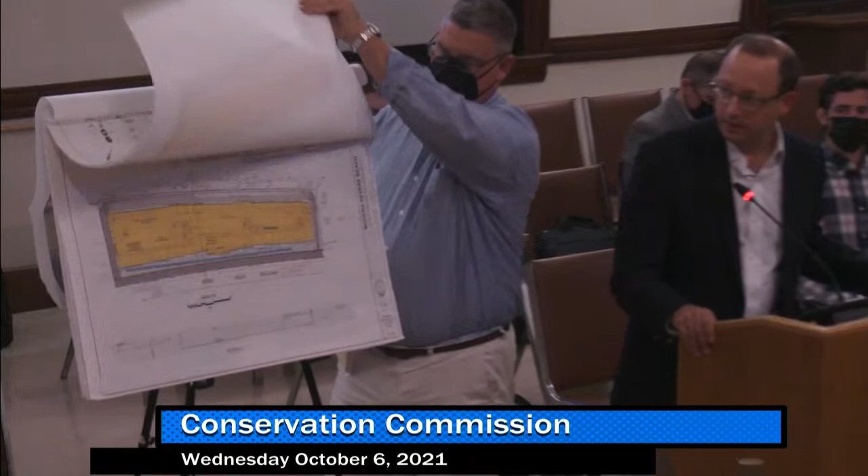It would be parking within a podium, starting on the lowest level, with 2 levels above of parking, all within the podium, and then 5 levels of residential wood frame construction above. The project is being designed and permitted within all the guidelines of the city zoning ordinance, so a by-right application, if you will, to follow all the local regulations.

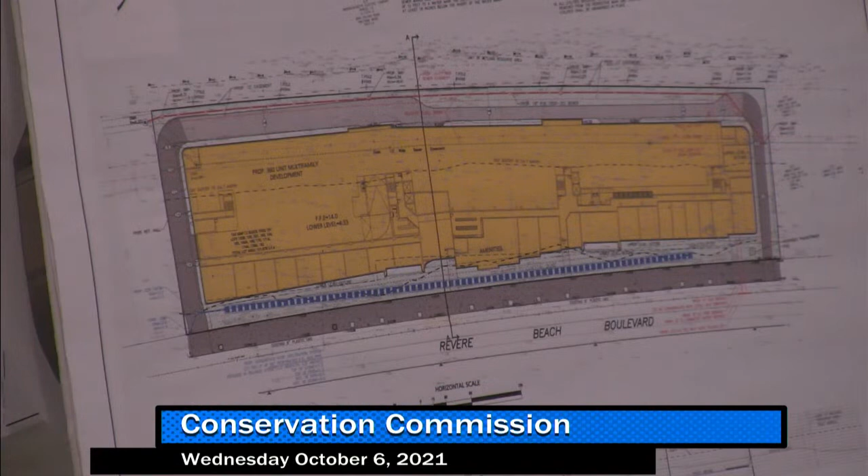What am I missing, Rick? I think that covers the basics. Talk a little bit about how you've mitigated any stormwater on site. Sure, yeah, Rick's probably best to go through that.

Thank you, Mr. Chairman, members of the commission. For the record, Rick Salvo with Engineering Alliance.

So the resource areas present on site: there's a salt marsh located to the rear of the property, off-site, on the other side of the narrow gauge railroad, which causes a 100-foot buffer zone to extend into the property. About half of the property is located within the 100-year floodplain, which is elevation 11. Obviously this is a coastal floodplain in this area, so it's the resource area known as land subject to coastal storm flowage. In the existing condition, there's an existing developed dwelling, very large, with a maintained and mowed yard area.

As most of you know, like all the other properties on the boulevard, these are pretty parallel. The grades range anywhere from elevation 12 to 15 at the boulevard, and then grade down to about elevation 5 or 6 in the rear. That enables us to set up a scenario where we can fit the building right into the topography, with access to the underground parking around the back at grade, and access to the street level parking, entering and exiting on the sides, also at grade. So stormwater runoff generally flows in a westerly direction from the boulevard towards the rear of the property.

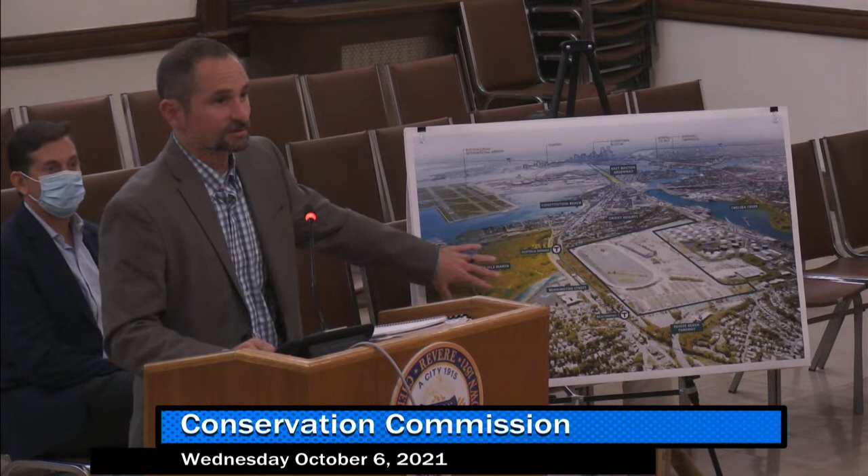In addition, we also had a notice of intent filed for a portion of the first phase of work being undertaken for the project. So initially we had this condition, and we've filed several notices of intent since. The goal is to maintain the project as we move forward by filing new notices of intent. This is a four-phase project. We're here showing you the first phase, and it will take many years to complete. We always refer back to this existing condition whenever we discuss it.

So with that, I'll step into the actual Phase 1R plans. The approach we're taking has two different components of the project: the infrastructure and roadway that supports all the buildings and parcels, and the buildings and parcels themselves. The roadway and infrastructure presented here is the initial phase of the roadway.

This northeastern portion, shown in thinner lines, had been previously approved under an earlier notice of intent. We're looking to supersede that order of conditions due to some changes requested and worked through with the city. There have been minor changes since that time, where we've removed a pull-off area along Winthrop Avenue, worked on utilities within the previously presented roadways, and adjusted some intersection alignments with the city. That's the reason for including that earlier Phase 1 portion in this project, and we're also extending the area where that Phase 1 portion used to reside.

So the thinner lines in this northeastern portion are now extending down further south, and we're adding additional parcels to that project. We have this R10 and 11 buildings, which is following this presentation. We'll be talking about that building, which is the lab life science building. In addition, we have a R4 parcel, which is temporary parking to support the needs of the project, and an open space parcel.

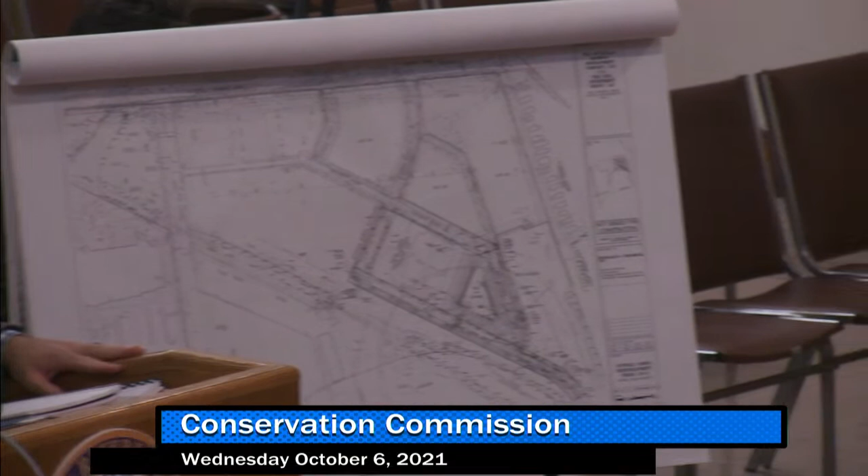And then this is the utility plan that I touched upon earlier. I believe that is it to summarize the program that we're proposing for this project.

So for some of the commissioners that didn't go on the walk, can you highlight where the flow from Sales Creek ends up?

Certainly. So there's a portion of Green Creek that flows, it's called Green Creek, it's still part of Sales Creek. It flows southerly here and runs along, it's kind of impounded along this section here, underneath Tomasello through culverts that's controlled by DCR, and then continues across. Currently, it's under another culvert here where the track passes over top of Sales Creek, continues further heading eastward towards Belle Isle Marsh, passing again underneath the other section of track.

From there, it passes underneath the blue line to where there's a pump station and a tide gate at Bennington Street. So that when at high tide, the tide gate's closed, water doesn't flow out. At low tide, it does flow out, but during major storm events, you have storm surge associated with it. To decrease the impacts of flooding due to a closed tide gate, the pump station kicks on, and that's all operated by DCR.

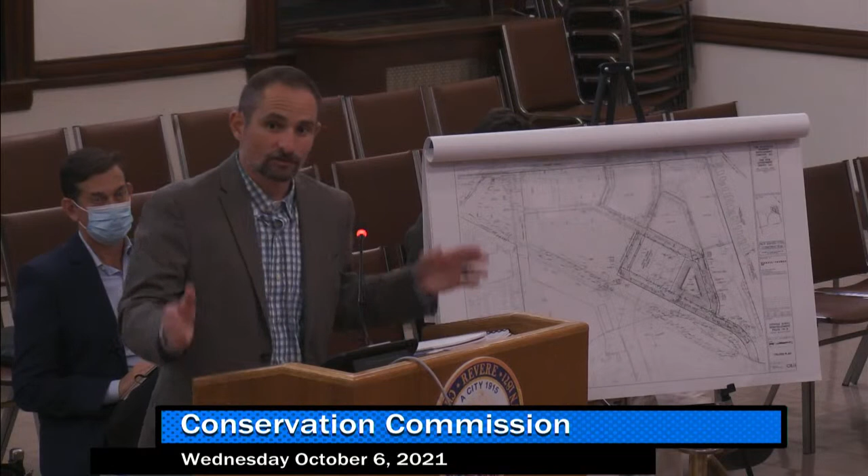The vast majority of areas here are fill materials that were brought in and left here in the 1920s and teens, and underneath that is the organics. As far as clay material goes, I'm not aware of a significant amount of clay material. I don't know, Seamus or Mike, if you do. I think the majority is the fill material.

And can you define what you mean by organics? Is that like peat? Yes. Yeah, well, a more familiar term to me. Sure, sure.

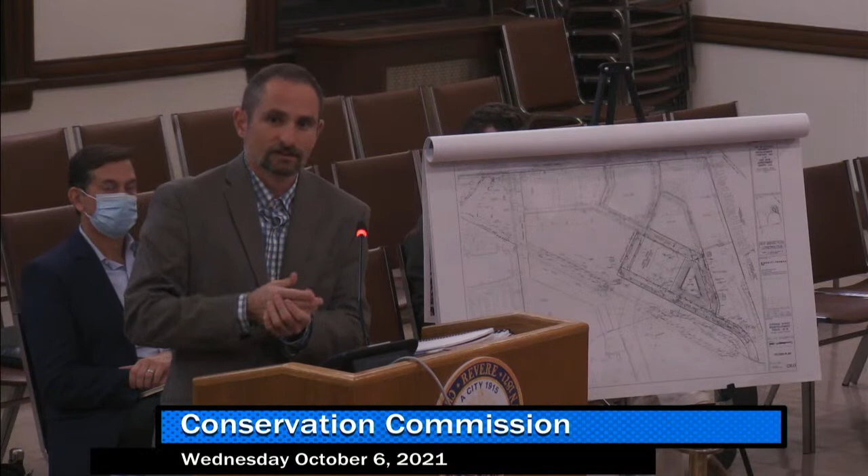So, but compacting that soil won't affect the permeability? So the intent is to actually pull the water out of the soil. It's not structurally stable as it is. What would happen if we installed a roadway on top of it? The roadway over time, the weight of that roadway would settle the soils underneath it, and you'd have cracking within the roadway itself, sidewalks, et cetera, in the area. So what this does is it squeezes that material down, compresses the material, pulls the water out of that material, and provides greater structural stability.

Well, the reason why I'm pursuing this line is that I'm thinking about what that area was, which was fairly lightweight stables, not a lot of heavy weight there, and open ground where the horses were around, et cetera. And I'm wondering if you're changing the character to the point where that land is going to be a problem as far as saturation when there's rain, snow, whatever. That's why I'm pursuing this.

Sure. So the soil type, these are D soils to begin with. So the infiltration rate of these soils is extremely, extremely low. So we are not looking to infiltrate substantial amounts of water into these soils.

It's hard to do, you can't do it. The water would just sit there, it would just pond up. So we have a higher water table to begin with.

So what we're doing is by compressing the material and installing a stormwater basin, we're redirecting the drainage to where it should go, which is Sales Creek and off the site. Under existing conditions, all water landed on the paved surface within the horse barn stables, off the roofs, off the pavement, and just sheet flowed directly to Sales Creek. Here, we're putting it into a detention basin, giving it some treatment, removing the suspended solids, and then directing it out to Sales Creek in a more managed way.

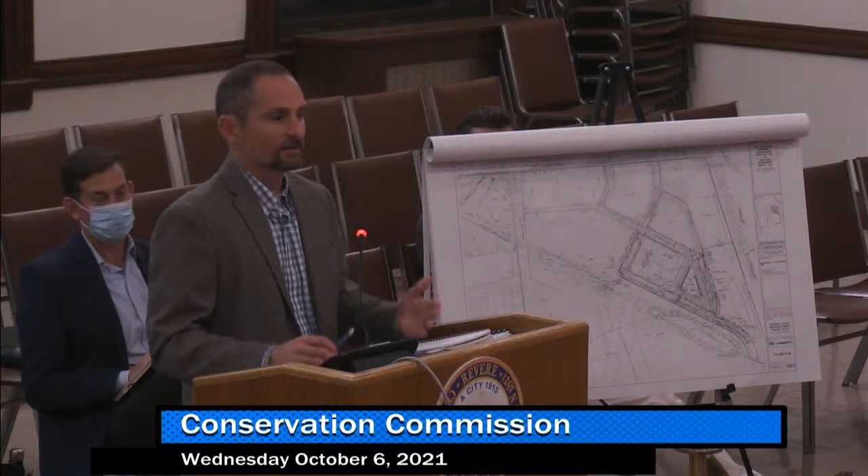Yes, we won't make it—I'd like to, we have a couple of new members and maybe some others to get a chance to let them see that, and what to look for. Certainly, and I should also mention we have the construction general permit that we've filed, and there's a stormwater pollution prevention plan that we'll also be following, that the contractor is also obligated to follow. Yeah, and that's typically the type of thing I would look at on a visit.

Any other questions from the commission before I go to the floor, the public? So, is there anyone here from the public though? All right.

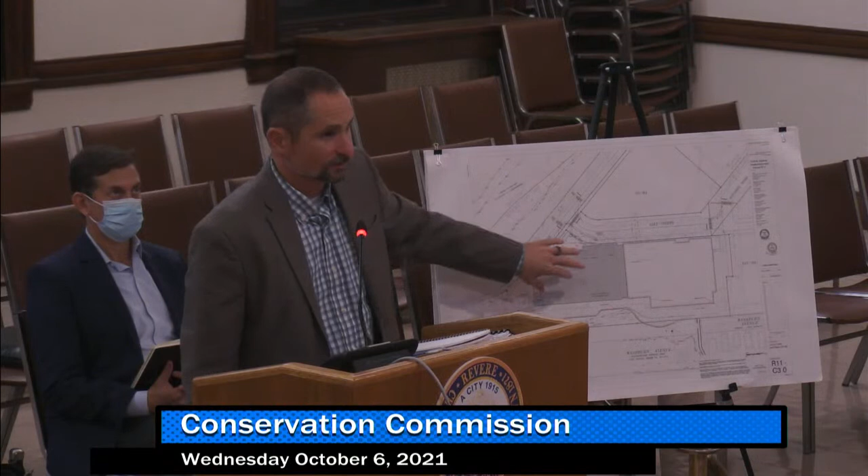There's loading for the facility located on the back of R11 and on the side of R10.

The access into the site was already discussed as part of the R9 notice of intent, which has previously been approved. We're utilizing the same access point that was previously discussed. Now we're just continuing that access to also provide the access for R10. The roadway itself comes around the backside of the building because there is an entrance to an underground parking facility located on the rear here.

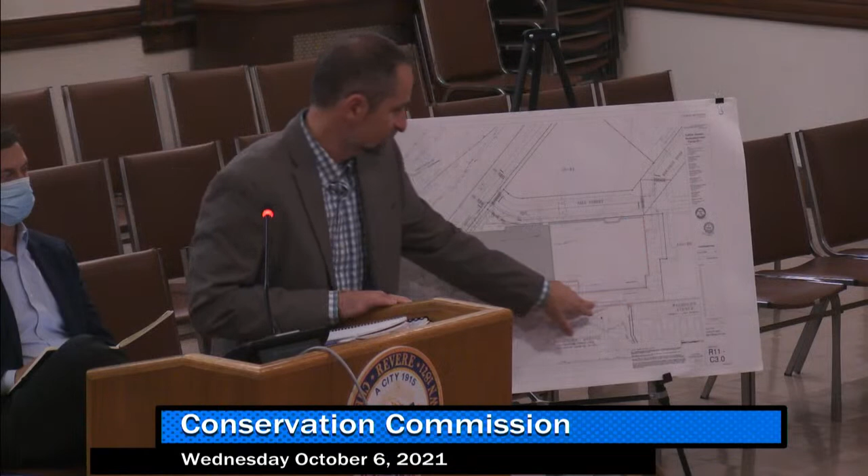Under an interim condition, you'll see a line located at the south of the page, eastern edge of the property, that dips down and comes back up. That's because while R11 is under construction, the access along the backside of R11 would need to be closed. So we need to allow for car access to come in, wrap around, and enter that underground parking. So R10 is going to be built first.

Sorry, I should have said that, yes. Yeah, okay. R10 will be built first, R11 will follow.

The resource areas here are land subject to coastal storm flowage, which entails the majority of the site. We have two wetland resources, one further south along the side of Washburn Ave, and also a smaller wetland here, which is actually part of what would be considered the Sales Creek ACEC, the area of critical environmental concern. That does connect through to Sales Creek.

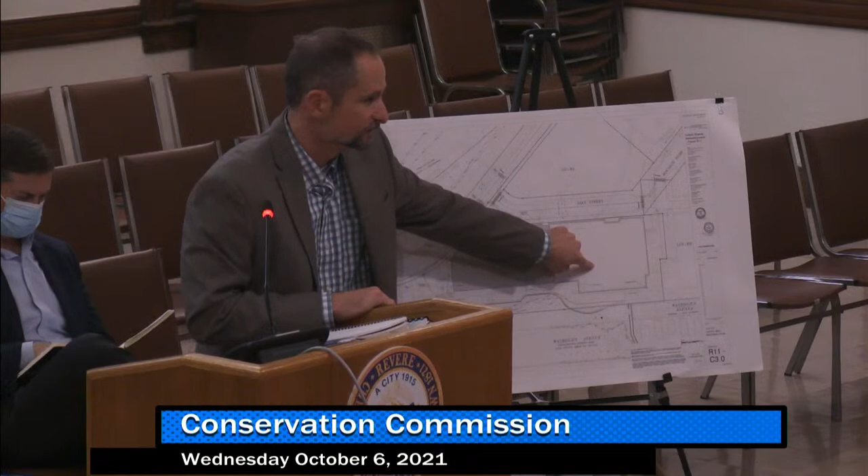So what we're doing is providing a limit of work line to allow for this turnaround to enter - that's under the interim condition. Under the final condition, we would remove all the pavement within that section and leave just the section that's necessary to access around the building.

We have transformers located adjacent to R11, on the south of page, eastern side of the site, located here. We also have electric facilities located within the building on this end over here.

Water and sewer connections are within the front of the building, and I should also mention the pedestrian connections along the front edge of the site - the sidewalk on the Salt Street side, as well as on the Sales Creek Drive side.

The final item I should mention is there is one retail component associated with the project on the first floor, and that would have some outdoor seating located on the north side of the site, right of page side of the site.

That's the facility. Impacts to the neighbors across Washburn? So there is a berm located - per the special permit, there is a buffer located along the rear side of the property, heavily planted along this section. I can flip to the landscape plan.

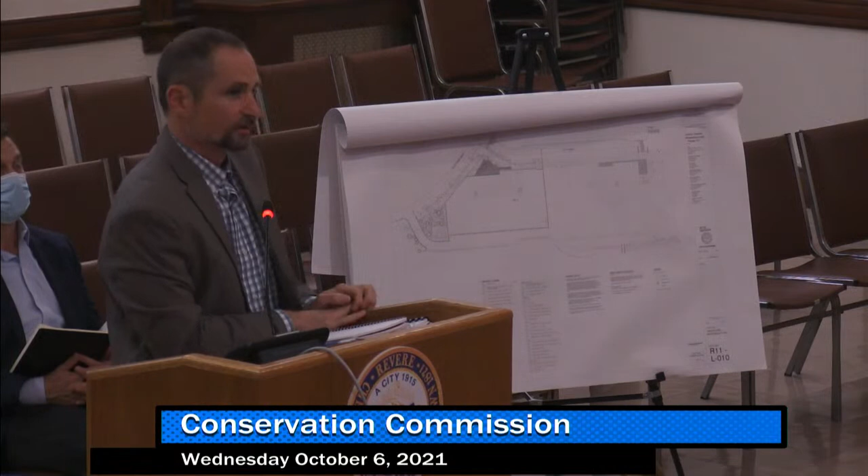So this shows the section of the Washburn buffer that shows the plantings associated with that buffer. I should note that the final house located along Washburn is owned by the proponent, which would end up being the house pretty much across the street from this site.

Any questions? I did have a question, but I think I was on the wrong page here. We're talking two different buildings. My question was on item number 6. I thought that was what we were discussing, and I wanted him, if this is what we're discussing, to define what they mean by mixed-use commercial building.

Sure. So this building has a variation of different uses associated with it. We have a retail component, which may be a restaurant, likely on the first floor. In addition, there's lab and life sciences uses within the building, and there may also be a manufacturing component. So the first couple floors of this building will actually be slightly taller than normal to facilitate that use.

Thank you. Sure. Overall height of these buildings is basically 6 stories. This one is a 6-story building. It's a 5-story building; the 6th story is the roof mechanical. And then there's the 2 stories of... yeah, sure. So it's 5 stories with one level of mechanical penthouse, and the building is roughly about 132 feet high.